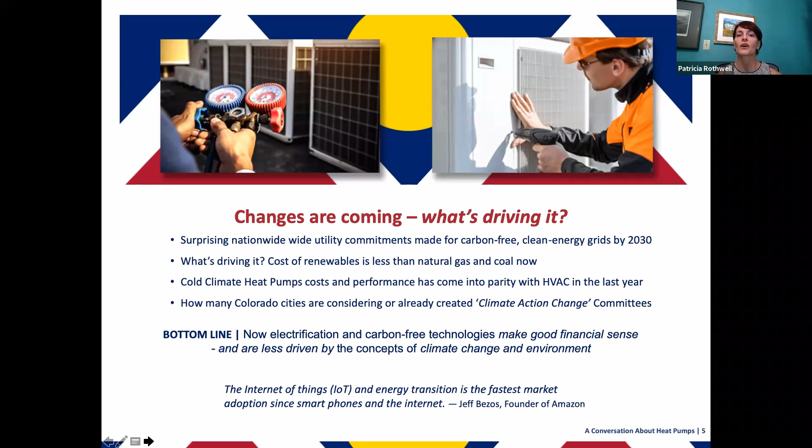So what does that mean to you, the distributors and the manufacturers? Our organizations presenting today are putting a lot of money into the market, and we're asking you to start early and be ready with us. We're asking that your contractors show up as our heat pump experts, to perform quality installs and make sure that heat pump equipment is available. We believe someone is going to be winning in this business, and we want it to be you.

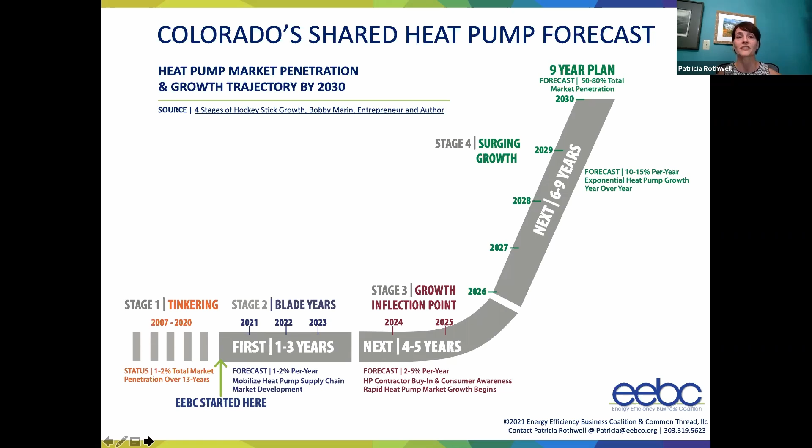So we're inviting you today to align your business plans with ours to cause this heat pump market transformation by 2030 in Colorado. And with that, I'm passing to the next speaker. Thanks, Patricia. My name is Kim Burke.

I'm a Senior Program Manager focusing on building policy at the Colorado Energy Office. I'm here to give you the statewide perspective on climate goals and how heat pumps and electrification figure into that. Colorado has made a strong commitment to climate leadership and a clean energy transition.

In January of 2021, Colorado released its greenhouse gas pollution reduction roadmap. The roadmap lays out an ambitious but achievable pathway to meet the state's science-based climate goals to reduce greenhouse gas pollution 50% by 2030 and 90% by 2050 from 2005 levels.

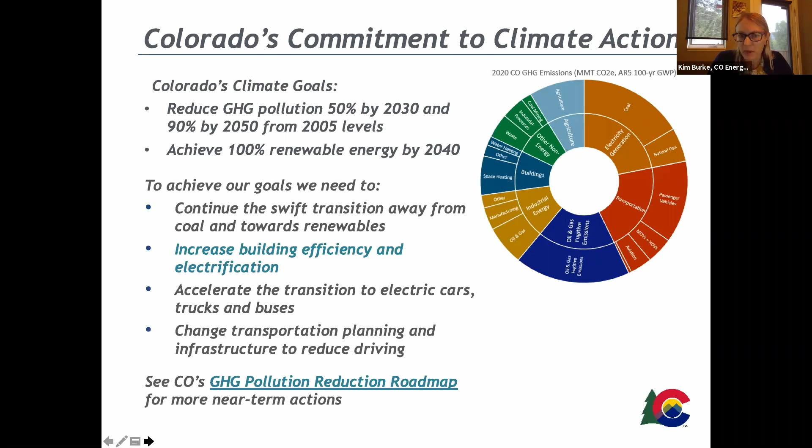The state is taking action on sector-based strategies to achieve these goals. For example, in the power sector, we will reduce emissions 80% by 2030 by transitioning away from coal and towards renewables. We also aim to reduce emissions 20% from industry and buildings by increasing building efficiency and electrification.

More than 30 bills passed in the 2021 Colorado legislative session, advancing clean buildings, renewable energy, energy efficiency, and transportation electrification. You can view a summary of all the bills on the Colorado Energy Office website.

But to highlight two that are relevant today, Senate Bill 246, known as the Beneficial Electrification Bill, requires regulated electric utilities to file program plans with the Public Utilities Commission to incentivize switching away from equipment that burns natural gas and propane to efficient electric equipment in new and existing residential and commercial buildings.

It calls out heat pumps specifically as equipment that will help Colorado reduce greenhouse gas pollution and improve indoor air quality, as well as health and safety in buildings. Senate Bill 264, known as the Clean Heat Bill, requires investor-owned gas utilities to file a clean heat plan with the Public Utilities Commission to meet greenhouse gas reduction targets through gas efficiency, electrification, or other technologies.

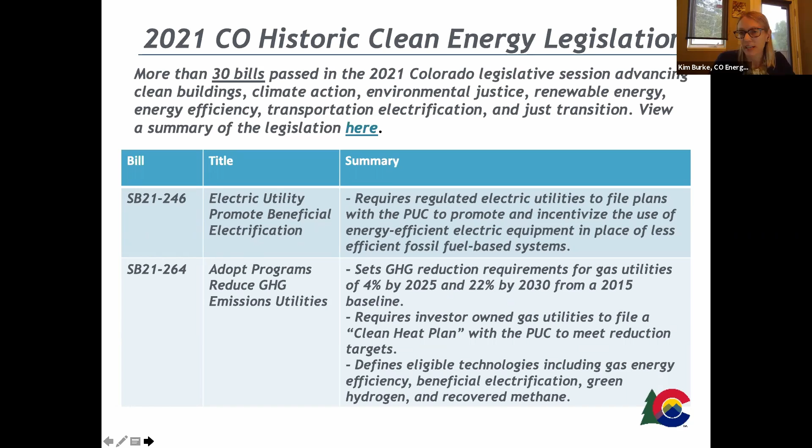And now I'll turn it over to Neil. Hi everybody, I'm Neil Kolwey with the Southwest Energy Efficiency Project, a nonprofit that promotes energy efficiency and clean transportation. But today I'm representing BELCO. BELCO's mission is to advance beneficial electrification in Colorado's buildings and industrial facilities.

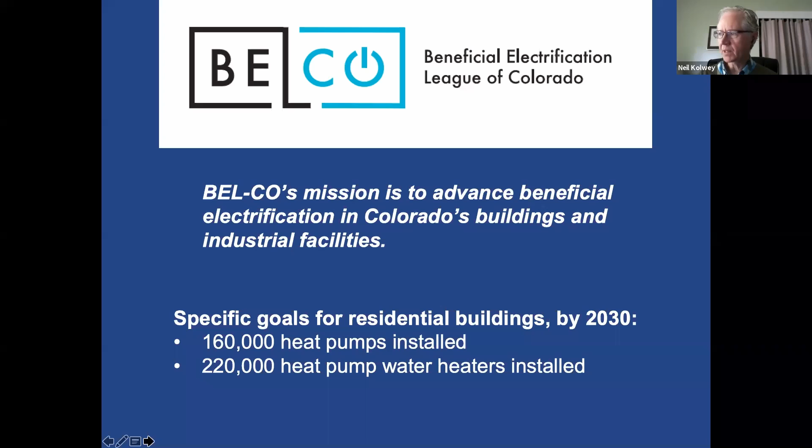We have specific goals based on the state's greenhouse gas emissions reduction roadmap that Kim just mentioned. By 2030 in residential buildings, our goal is to have 160,000 heat pumps installed and 220,000 heat pump water heaters installed. Along with these goals, we expect heat pump sales to surpass air conditioning sales within the next 5 years or so. So hopefully this is a business opportunity for you all.

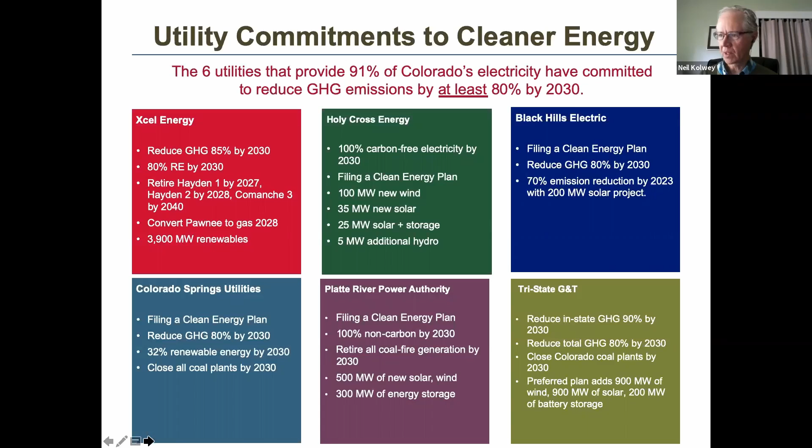The 6 utilities or generation companies that provide 91% of Colorado's electricity have committed to reduce their greenhouse gas emissions by at least 80% by 2030. This provides the foundation for reducing greenhouse gas emissions through electrification of building fuel uses through heat pumps, mainly, where this is cost effective. 40 out of 52 electric utilities in Colorado currently provide rebates for heat pumps.

Here's the range of rebates offered. You can see it starts with $500 per heat pump from the PRPA member municipal utilities. And the most generous rebates are being offered by Holy Cross Energy, $850 per ton for cold climate heat pumps that are replacing gas heating.

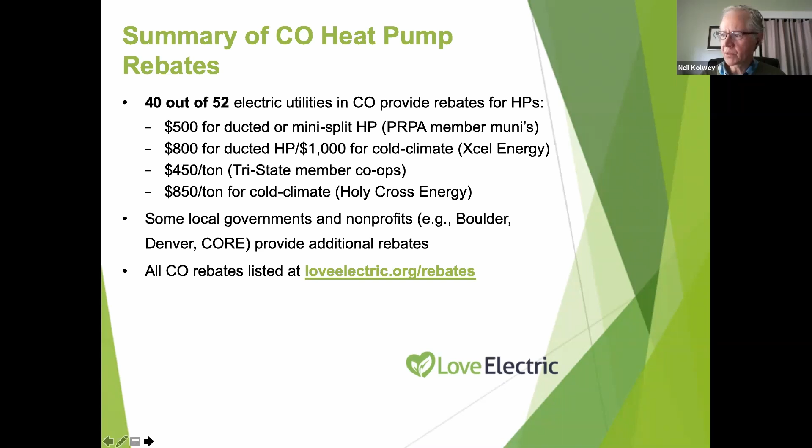In addition, some local governments offer rebates on top of the electric utilities rebates, and all of the Colorado rebates are listed at loveelectric.org/rebates. There are other excellent resources available at Love Electric, which we list in the resource slide that we will send you. Now, I would like to introduce Jan Kelleher of the City and County of Denver.

Thanks, Neil. Hi everyone, my name is Jan Kelleher. I'm the Building Electrification Lead for the City and County of Denver. Denver is pursuing a multi-pronged approach to reducing the city's space and water heating emissions.

First and foremost, we are starting the process to update our new building codes. We are planning to have at least electrification-ready requirements in the 2022 building codes and are evaluating either partial or full electrification community and city staff proposals.

All new homes will be required to be all electric starting in 2024, and commercial buildings will have to be built all electric in 2027, with electric space heating required for commercial buildings in 2024. However, this timeline may be further advanced as we are seeing significant interest and advancement in technology for large commercial buildings.

Denver continues to grow at 2% annually, meaning by 2050, most of Denver will be new buildings built over the next 30 years. We are also working on ambitious policy for existing buildings.

Over the last 8 months, a diverse task force has developed recommendations for the City and County of Denver to decarbonize its existing buildings. They just completed their process last week and currently recommend the following.

Barring any significant economic or technical infeasibilities, starting in 2025, end-of-life replacements of all furnaces and air conditioners in commercial buildings, as well as rooftop units, would be required to be either heat pumps or heat pumps with electric or gas backup, also known as hybrid or dual fuel systems.

So this would be only when systems are being replaced at the end of their useful life, a heat pump would have to be installed.

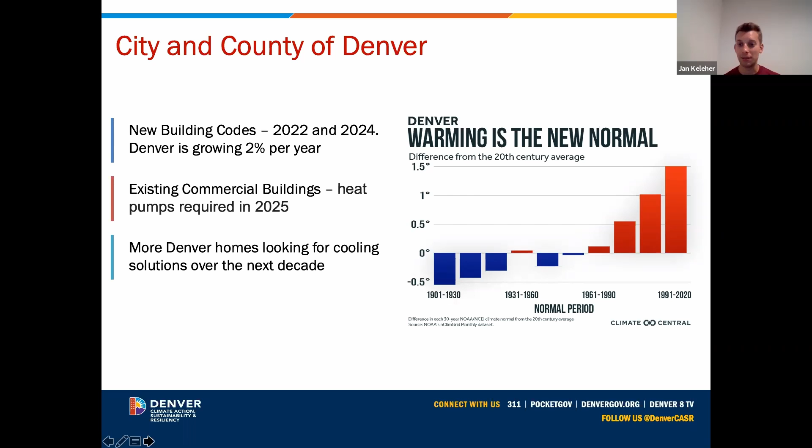Thank you, Jan. Hi, I'm Carolyn Elam, energy manager with the city of Boulder. Much like Denver, Boulder has really been looking to our building codes to help drive heat pump adoption in our community. Since 2017, we've been effective at getting heat pumps adopted. At this point, there's no single family home being built in Boulder without heat pumps for space and water heating. We're also seeing heat pumps emerging as the cost-effective choice in our multifamily and many of our commercial buildings.

So we have a lot of experience with them operating in our climate. We know they work. Boulder does invest in spring and fall marketing campaigns to educate our community. We've certainly seen consumer awareness increase significantly, mirrored in adoption rates, starting to be on par with AC in our community. So we continue to invest in these types of marketing campaigns and want that to benefit our industry as well.

We do actually in Boulder have advising and incentive programs available for both our residents and our commercial businesses. Similar to what Jan mentioned, when we pair those with Xcel rebates on our residential side, we've often seen our rebates approach as high as $2,000 per unit. That really has helped drive adoption.

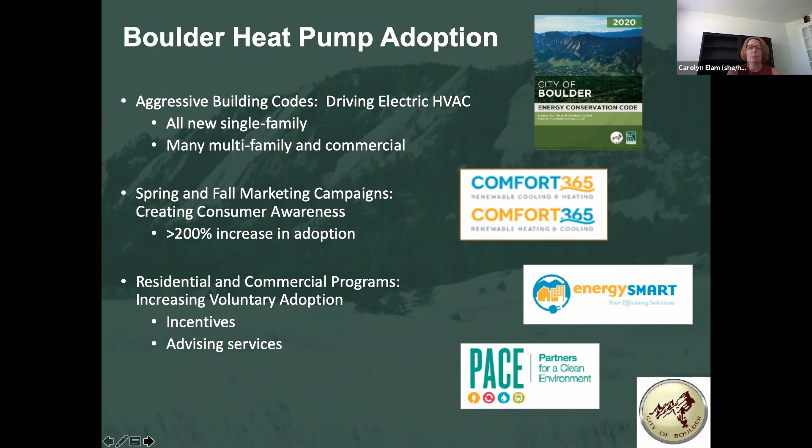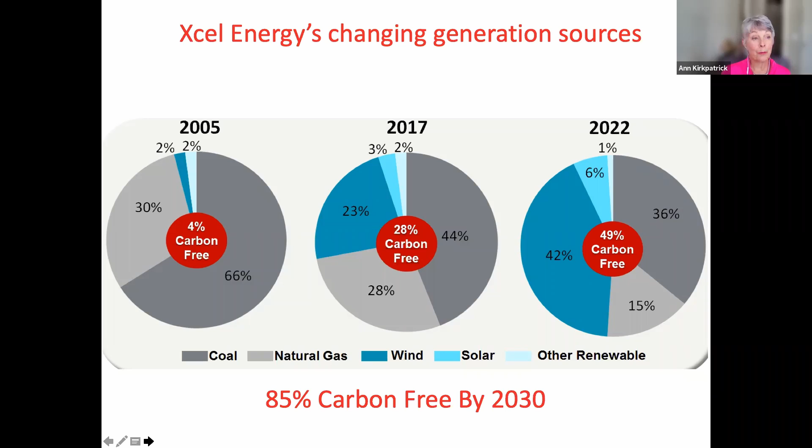Thank you. Hi, I'm Ann Kirkpatrick with Xcel Energy. From Xcel Energy's perspective, wind and solar power are now the lowest cost generation sources. You can see that we are growing those generation sources quickly and shrinking greenhouse gas generation sources. We expect that we will make our goal of being 85% carbon free by 2030. Heat pump adoption is essential so customers can use the increasingly inexpensive renewable sourced electricity available to cool and heat their homes and their hot water.

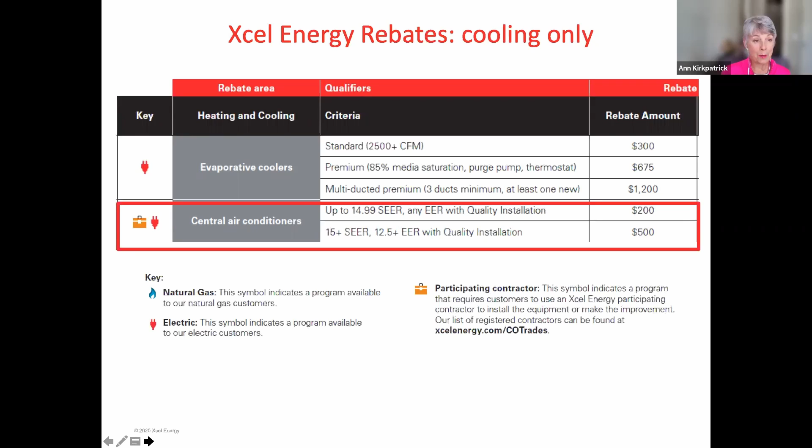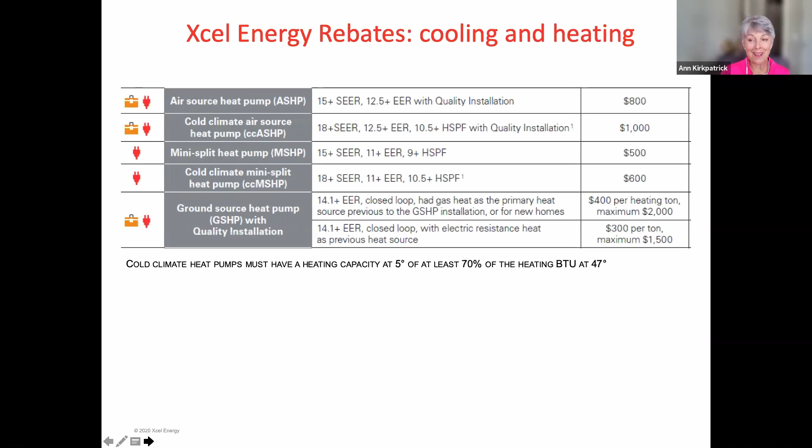In our last DSM filing, several stakeholders asked us to eliminate the lower tier of AC rebates, and the compromise was to lower that rebate by a third. Conversely, stakeholders demanded more heat pump measures and higher rebates. All heat pump rebate levels increased substantially, and cold climate heat pump rebates are now available as well. For new homes, there are new, much higher electric-only incentives for builders.

For new combo homes, those that are powered with both gas and electric service, rebates remained the same. Gas-only rebates decrease from the combo levels you see in that column in 2021 to at least 50% less in 2022. In closing, Xcel Energy is committed to a clean energy future, and heating homes primarily with heat pumps is an important part of that strategy.

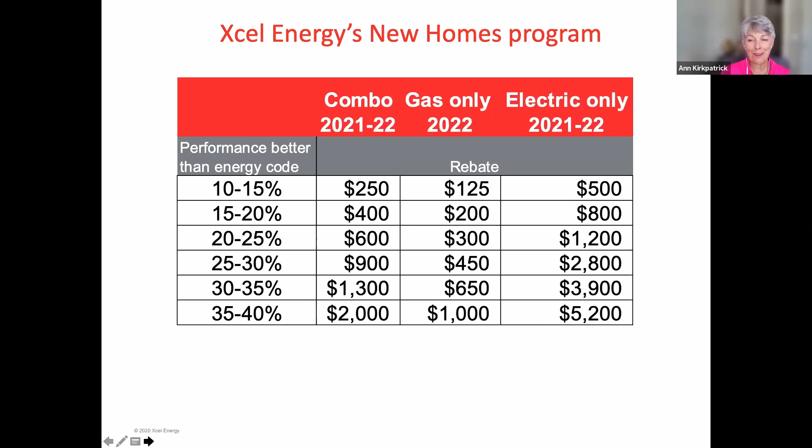Hi, everybody. I'm Mary Weiner with Holy Cross Energy. Holy Cross is a rural electric co-op providing electricity from Vail to Aspen and down to Parachute. So we are in climate zone 5, 6, and 7.

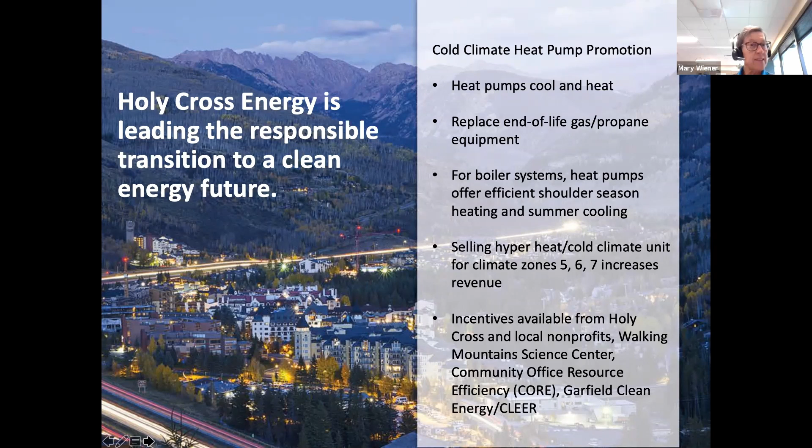Holy Cross offers a very attractive rebate for fuel switching from propane or natural gas of $850 per ton. We also have some local nonprofits that are offering rebates from anywhere from $1,500 to $3,000 on top of Holy Cross's rebate. So when you add up the heat pump, cold climate heat pump rebates, the incremental cost between a gas furnace and an AC system compared to a heat pump is now very competitive in our territory.

I'd like to bust some myths I'm hearing out there. One is heat pumps don't work in cold climates. Well, I live in a cold climate, and we have over 300 heat pumps in Holy Cross territory, anywhere from 6,000 to 8,000 feet. One of our biggest projects was the Gant, a condo complex with 164 units in Aspen that installed

147 cold climate air source heat pumps, mainly for cooling and for shoulder season heating because they have a hydronic boiler system. The homeowners and the guests love the heat pump so much that they're using them more than the gas heat. The general manager emailed me a couple winters ago and said, these things are working great, and it's -20. Another big project that recently was done was Aspen Skiing Company in the El Jebel Willits area installed 43 heat pumps and a Sanden CO2 heat pump water heater system for their new employee housing.

We also have an income qualified program where we're making it much healthier and safer for our income qualified people in mobile homes, where we're converting from propane furnaces to heat pumps. And Basalt Vista, a 27-unit affordable housing in the Basalt area built by Habitat for Humanity, went all electric with heat pump water heaters and cold climate heat pumps.

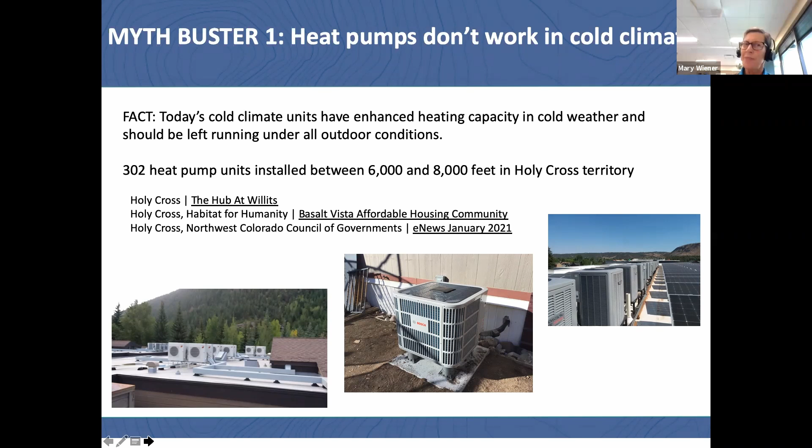And a recent RMI report just reported that because of the heat waves we're seeing throughout the country, these heat pumps are very cost effective compared to other ways of cooling.

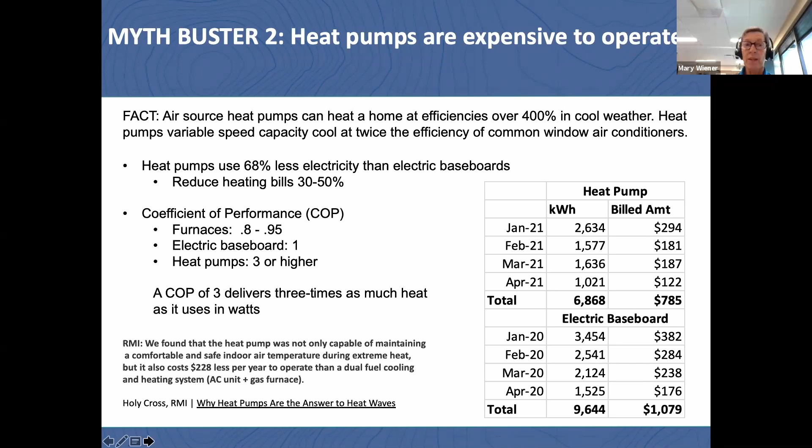Now I would like to introduce Scott Suddreth from Platte River Power Authority. Thanks, Mary. Hello, my name is Scott Suddreth, and I'm with Platte River Power Authority up in northern Colorado.

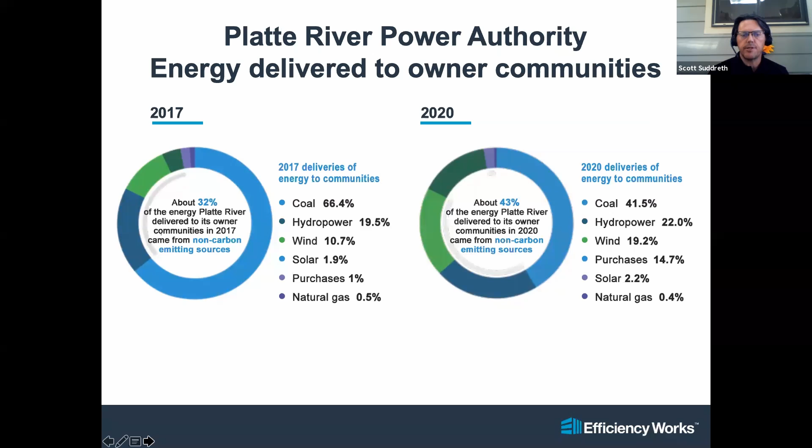We're the generating utility for our 4 owner communities: Fort Collins, Loveland, Longmont, and Estes Park. In 2017, 32% of our energy came from non-carbon sources, and in 2020, it's 43%. We're actually heading to zero. Our goal is to have 100% carbon-free energy by 2030. We've already enacted a plan to get 90% of the way there.

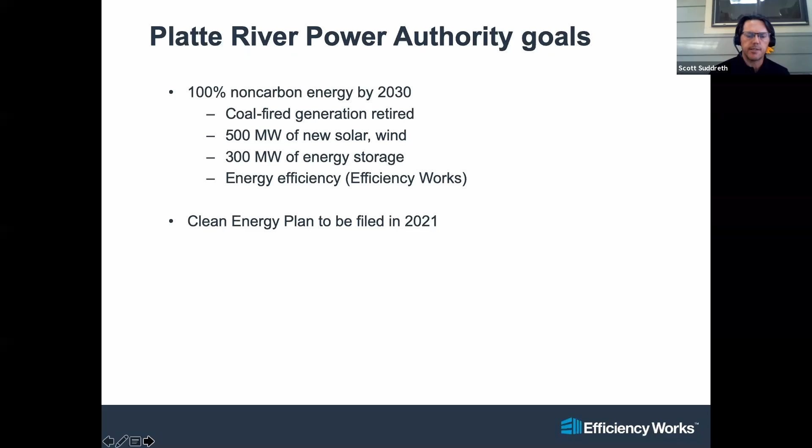There's a number of things we're going to be doing to help our communities get there, including pursuing beneficial electrification through heat pump technologies. We already have communities heading down paths with sustainability committees and other efforts to figure out how to get their carbon down, and beneficial electrification is one of those tools we'll be using. So using our existing program, Efficiency Works, we already have heat pumps being offered to help achieve that carbon reduction, along with the insulation and air sealing rebates necessary to make sure the heat pump can keep that home comfortable.

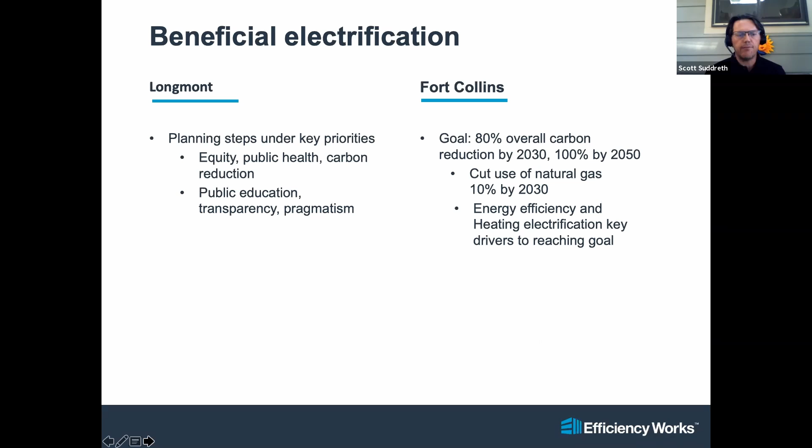I'm going to hand it off to the next speaker, please. Thank you all for being here. My name is Peter Rusin, and I oversee our quality install program for heat pumps at Tri-State Generation.

We not only supply the power for 17 utilities in Colorado, we also design and implement rebate programs with our utilities. Our utilities run from the Eastern Plains, the Front Range Corridor, and the Western Slope, and account for approximately 20% of the electricity consumed in Colorado. As you've seen with the other utilities, we are invested in this technology, and we provide incentives for consumers up to $450 a ton.

But one thing Neil didn't mention is that some of our utilities match. So in Winter Park, the quote 'ice box of Colorado,' that is over $1,000 a ton. A lot of money is flowing into heat pump equipment. We also provide a contractor spiff of $250 per install, and work with our communities on consumer education through workshops and social media. We've supported this technology since 2014, doing field studies, adding incentives, and steadily increasing our support as the technology has improved.

This is why Tri-State is here today: what is our next level of support, i.e. money? Distributors play a key role in this transition and we want your feedback. Does a midstream rebate for distributors move the needle? Does reducing restocking fees help? Should we offer product and marketing training for the sales counter? We're open to many ideas and finding solutions, and look forward to the discussion.

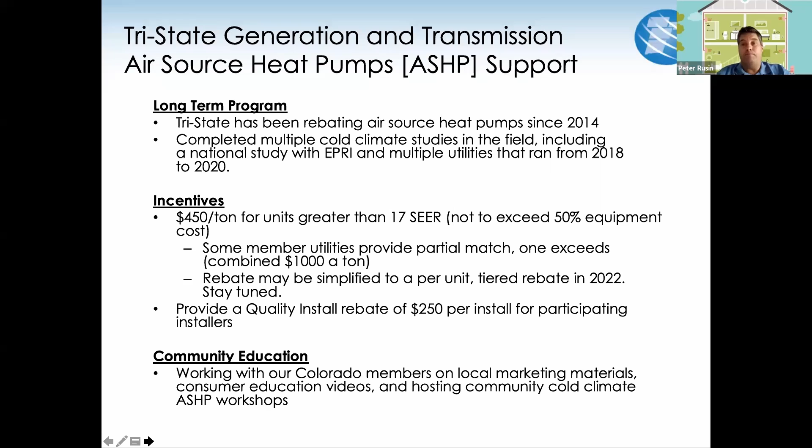I'll turn it back to Ann now. Thanks, Pete. So we've heard a lot of information in this section, and we've provided a little summary of the big ideas. As you walk away, these are the things that are really sticking with us when we put it all together. We know that legislation, regulation, and codes are driving change.

6 utilities that provide 91% of Colorado's electricity are committed to beneficial electrification of buildings. 40 out of 52 utilities that provide electricity in Colorado are offering rebates to help close the price gap between an AC and furnace and the cost of a cold climate heat pump, sometimes stacking those rebates. It is well established that cold climate heat pumps work in our Colorado climates, including at high altitude.

We know that customer demand is growing, and we know you're seeing that as well. And the organizations you've heard from today are making significant investments in all kinds of ways in heat pumps. And the heat pump market potential for you is huge.

So now it's time for us to hear from you. We're going to use the chat to help frame up the conversation in 3 parts: questions, successes and plans to date that you have, and what we need to solve for to help you make this market transition happen.